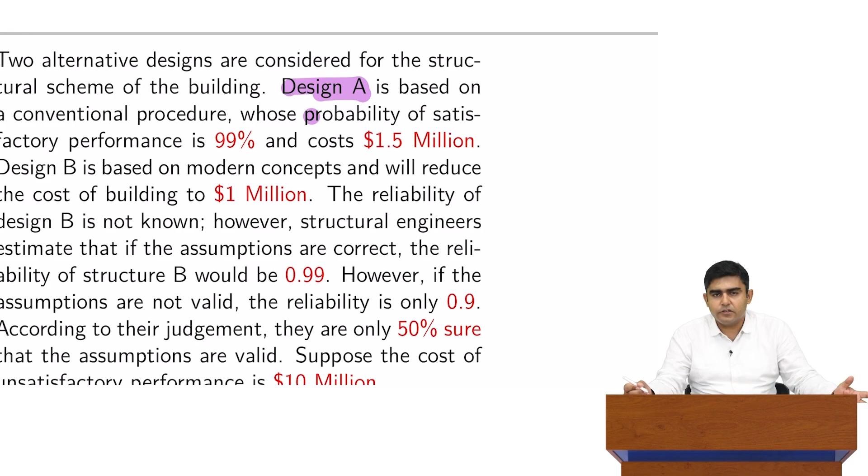Here is the example we already discussed regarding a decision problem where two alternative designs are being considered for a structural scheme of a building. Design A is based on a conventional procedure, how things are usually done, and its probability of satisfactory performance is 99%, with 1% chance of failure, and it will cost around $1.5 million.

Similarly, design B is based on modern concepts and will reduce the cost of building to $1 million, a substantial saving of almost $500,000. So we should be inclined to go with design B and the case is solved. But that's where additional information comes into picture, that is, the concept of reliability.

Further information is given that the reliability of design B is not known because it's a new design. People cannot comment on its reliability or long-term performance. But structural engineers made some estimates while designing, based on certain assumptions. If these assumptions are right, structure B would also have reliability of 99%, same as structure A. However, if assumptions are not valid, reliability is only 90%. According to judgment, there are only 50% chances that their assumptions are valid.

So they made certain assumptions, and they are 50% sure those assumptions are right. If assumptions are indeed right, the structure is 99% reliable. If assumptions go wrong, the reliability drops to 90%, in comparison to 99% for option A.

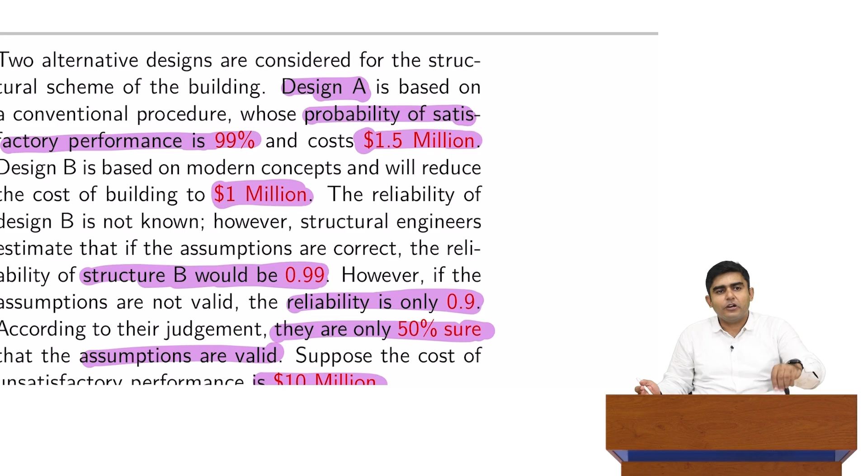Now there is a dilemma. Should we go for option A or option B? Before we solve that, let us pay attention to various components we saw in this problem. We saw multiple elements of uncertainty, multiple costs associated, and we have to integrate all of these together.

This is not mathematical integration, but bringing all this information together into a systematic framework. That is where decision trees become important. What we saw earlier is a decision problem, and all its components can now be integrated into a decision tree.

What will a decision tree have? It will have all feasible alternatives available to us. In this case, two designs are our feasible alternatives, design A and design B. It will also list all the probability assignments, that is, the chances of satisfactory performance of A, B, or other options if multiple are available. In our case, we only had two options, so what are the probabilities associated with A and B?

And monetary or utility consequences associated with each outcome. For example, if the structure performs satisfactorily, the only cost we bear is construction and maintenance cost. If the structure fails after construction, we have already paid for construction cost, and now we have to pay for consequential costs, which are 10 times the construction cost. So all this information can be systematically integrated into the decision tree.

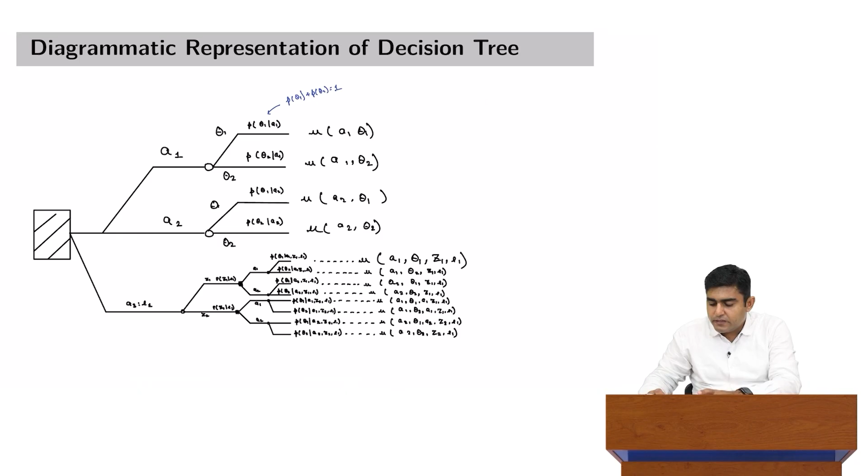That is, what is the cost of going with option A and option B. When all these elements—alternatives, probabilities, and costs—are listed exhaustively, we end up with a decision tree that can help us make decisions in a much more informed manner. Let me put all these things together generically, showing how a typical decision tree with multiple options looks. This is the first square node we spoke about. A1, A2, A3 are all the alternatives available to us.

A1 and A2 will have certain probabilities. For example, in the earlier case, theta 1 can take a value of 0.99 and theta 2 can take a value of 0.01, where theta 1 is associated with satisfactory performance and theta 2 with non-satisfactory performance. U1 and U2 are the costs associated with theta 1 and theta 2.

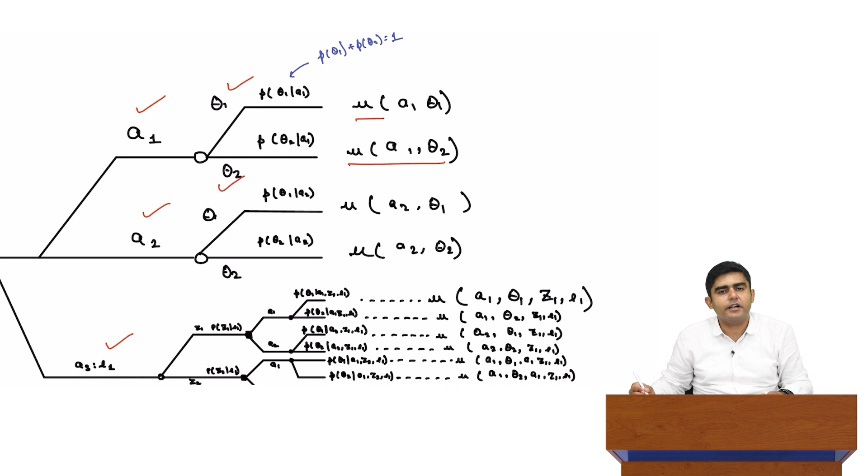Now, if you pay attention, we have been talking in terms of conditionals here. Given that we go for A1, what is the probability of things going right? Given that we go with A1, what is the probability of things going wrong? This cost is a function of the decision we made and the values of probabilities associated. So here, A1-theta1 and A1-theta2 come into picture.

Now, if I have n number of alternatives available, I can repeat the same pattern. But notice that when I walk along A2, I will again encounter theta 1 and theta 2 at my chance node, represented in circular fashion. Now theta 1 would be conditional on having chosen decision A2, and theta 2 will also be conditional on having chosen decision A2. The final costs would be a function of A2 and theta 1, and A2 and theta 2. Depending on more details available, these decision tree branches can take a much more complex form.

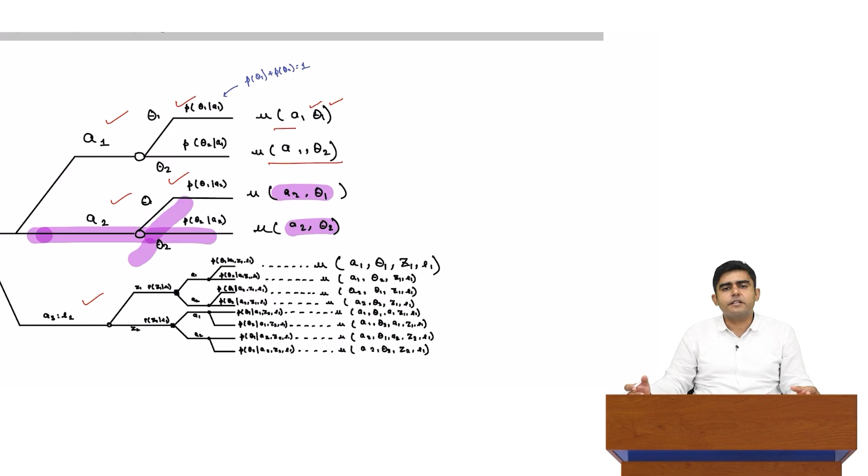We won't worry about that at this stage, but all these components when put together give us a decision tree to systematically analyze and take a call on the options available.

There are a few points we have to note before constructing our own decision tree. Outcomes from a chance node are mutually exclusive and collectively exhaustive. What do these two words mean? Let us pay attention to that. Mutually exclusive means either the structure is failing or the structure is not failing—theta 1 and theta 2 are mutually exclusive of each other.

They are also collectively exhaustive, meaning the sum of probabilities at each chance node should equal 1. Probability of success is 0.99, and probability of failure should be 1 minus the probability of success, that is 0.01. This has to be followed at each chance node to have a complete decision tree, and that takes care of mutual exclusivity and exhaustivity—sum of probabilities at each chance node should be equal to 1.

If we are ensuring that our entire space is captured, we have already addressed this while talking about collective exhaustiveness—the probabilities should sum to 1. Only then will we say that the description of each chance node is complete.

Finally, the desirability of consequences of each outcome is measured by the utility value recorded at the end of the sequence. At the end, we will convert it either to a dollar value, rupee value, or some other utility, and compare across alternatives so that we know which particular alternative gives us the highest utility, even in monetary terms or otherwise—and that will be our final decision.

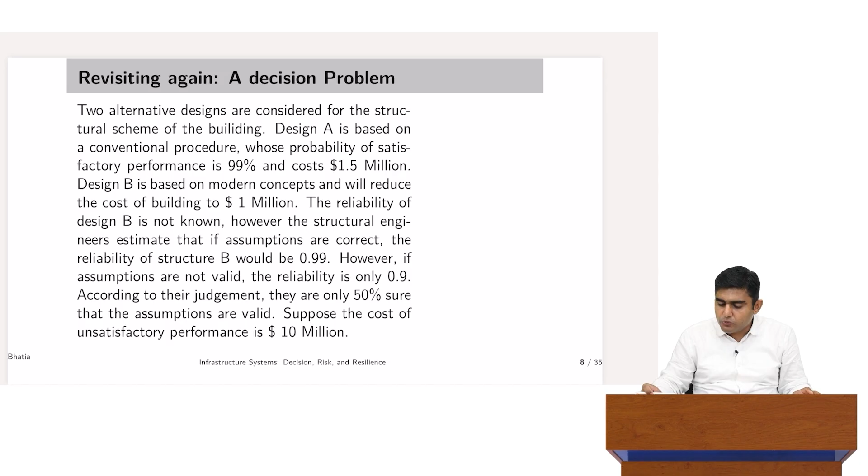So with that, we can go back to our problem again and try to come up with our decision. The same problem stated again, but now once we make a decision tree of it, it would look very different and much more elegant.

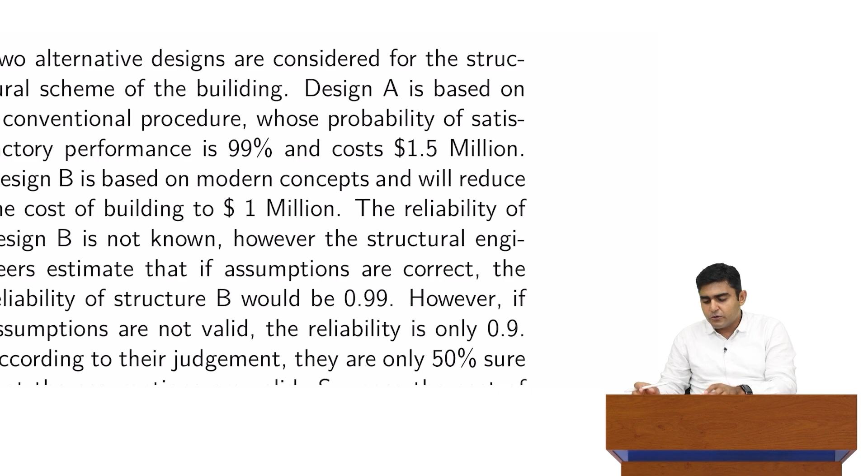Same text, two options A and B, having different probabilities. So we have to construct the decision tree for this. Let us start this process of constructing our own decision tree. What is the first step? We have to place a square node from where alternatives will be born. I also call this the root of any decision tree. From this root, two branches will take off: one associated with option A, and the other associated with option B.

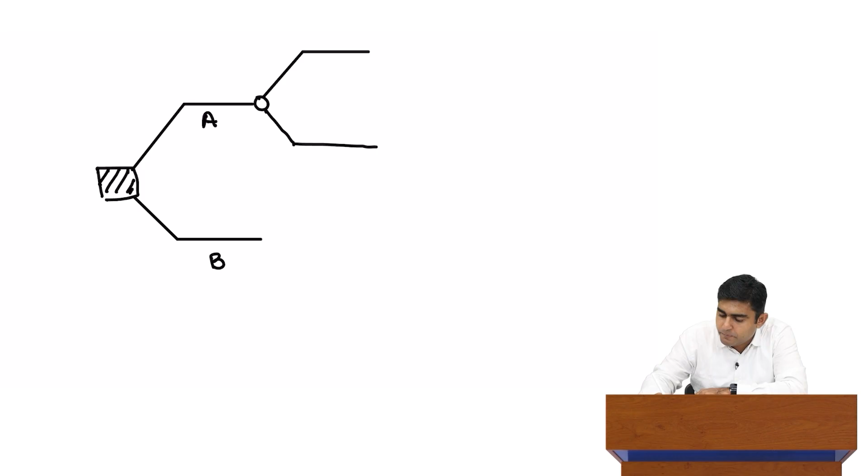Now, option A is not guaranteed to perform satisfactorily 100% of the time. In fact, it is stated that it will perform to the desired level of functionality 99% of the time. So we will say the chance of not failing, anything with the hat, makes it not failing. Chance of failing should be 0.01, and this takes care of mutually exhaustive as well as exclusive events happening here.

Now, when A does not fail, what is the cost associated with that? Cost associated is whatever is the cost of construction, 1.5 million, because if you are going with A, you have to construct A. So the cost is 1.5. If A fails, what are the costs associated? 1.5, the cost we incurred while constructing it, plus the additional or consequential costs we have to pay when the infrastructure fails, which is another 10 million. So the total cost becomes 11.5. In this case, it is 1.5.

Now let us do the same exercise for option B. This decision tree will take a more interesting form because we don't have confidence on failing or not failing. We have made some assumptions. If the assumptions are correct, the chance of it happening is 50%, or the assumptions themselves can be incorrect, with chances of that happening again being 50%. So again, this is a chance node.

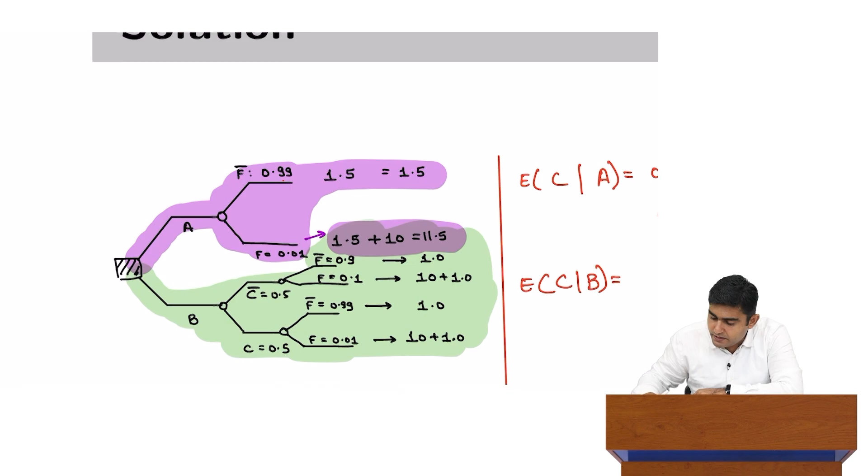Similarly, when I go for B, expected costs: here there is a 50% chance that my assumptions are correct. When my assumptions are correct, the chance of not failing is 0.99, and the associated cost at that time is 1 unit. The chance of it failing is 0.01, and the associated costs are 10 plus 1.

When my assumptions are incorrect, that can happen with 50% chance. That's why 0.5 comes here.

Hence the costs are essentially separated for component A and B and summed differently for individual branches of the decision tree that we have constructed. When we simplify it, this number comes out to be 1.6.

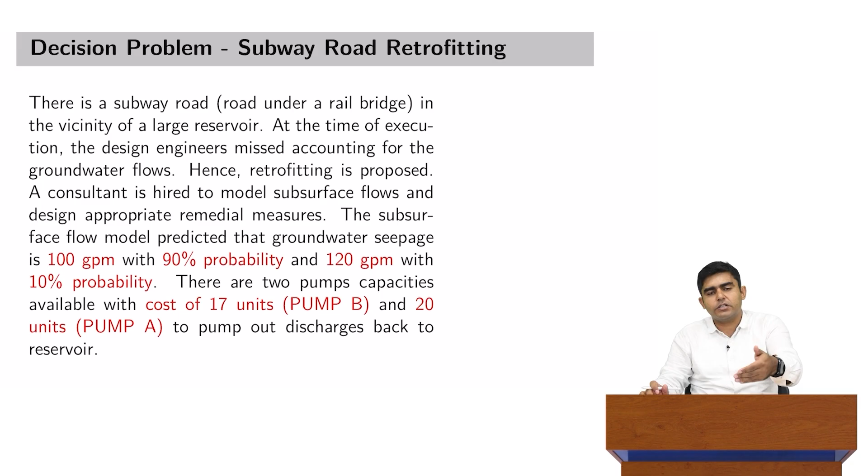And this is what decision tree and decision making looks like, despite all the confusions, options and uncertainty available to us. Of course, this is a very simple example, but we also encounter decision trees in real life. The previous example that I took is one of the examples in the textbook we are following, that is Ang and Tang volume 2.

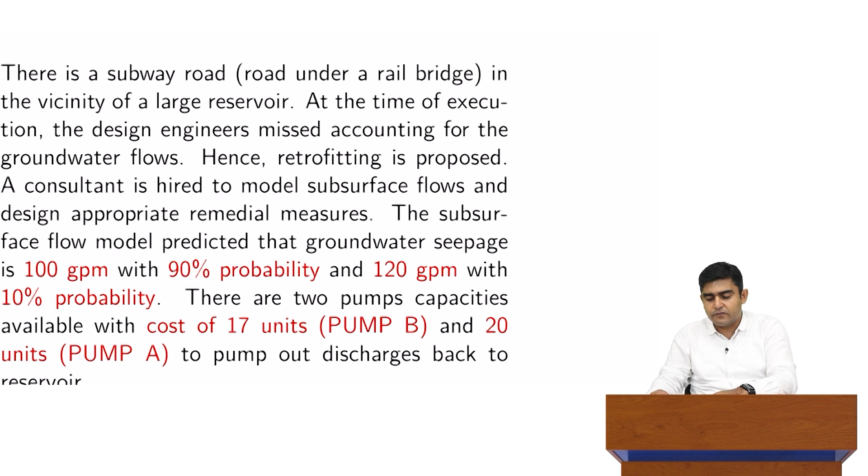But the example I am talking about now is a real world example from one of our own projects that we did for one of the stakeholders. And this is an interesting problem.

What it states is that there is a subway road that goes under a railway bridge in the vicinity of a large reservoir. That reservoir is full most of the times. When that subway was being constructed, the designers missed accounting for the groundwater flows that may come from the reservoir. While water from rains and other sources were accounted for, that reservoir in proximity, we missed somehow.

Hence, it was proposed that we should do some retrofitting and avoid the flooding situations in the subway. So a consultant is hired to model subsurface flows and design appropriate remedial measures for that particular infrastructure.

The subsurface flow model predicted that groundwater seepage is 100 gallons per minute with 90% probability and 120 gallons per minute with 10% probability, because modelers would also not have all the information that they would desire available to them. So they will also make some approximations about subsurface strata, about the level of water in the reservoir, how far that particular water is, when you also account for the porosity of the soil, how much length that water has to travel to reach the subway and so on.

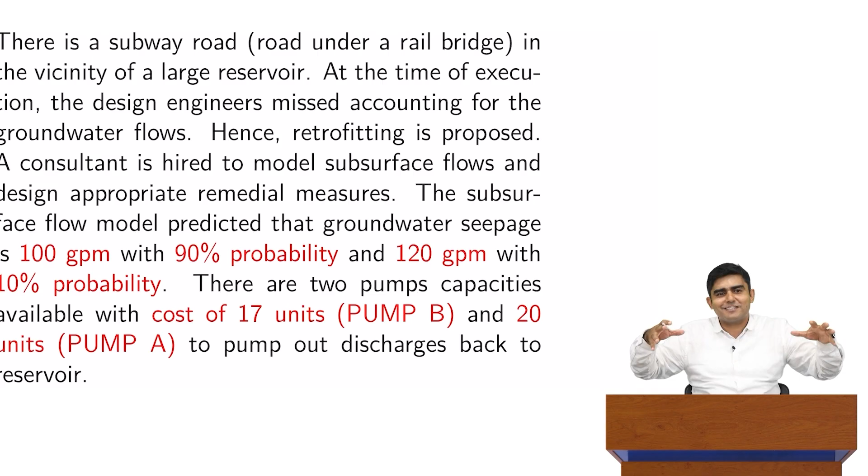And the cost of pump A is 20 units to pump out discharges back to the reservoir. Of course, a smaller pump will also cost less money, and a larger pump will cost us more money. If flow is less and a larger pump is installed, we might have wasted some money, but the cost of maintenance of the larger pump in that particular case would be a bit lesser because its capacity is much more. It is running at lesser load, so the deterioration would happen at a bit slower rate, and all those numbers are also needed.

Now, since pump B is of smaller capacity and discharge is indeed higher, that means there may be a situation of flooding. So what we may have to do is that if we end up installing a smaller pump and more water comes in, we may have to augment the capacity and install another smaller pump, which may cost another 8 units. The design life of this entire project is 30 years.

During that time we will encounter certain maintenance costs and replacement costs that we calculated to net present value of 22, 21 and 5 units. This is a new term, net present worth or net present value. When we talk about money matters in decision making we will cover this in detail, but right now these are the costs we may have to pay lump sum today, at the decision making point, for various pumps. For pump A we may have to pay 22, for B 21, and for C 5 units.

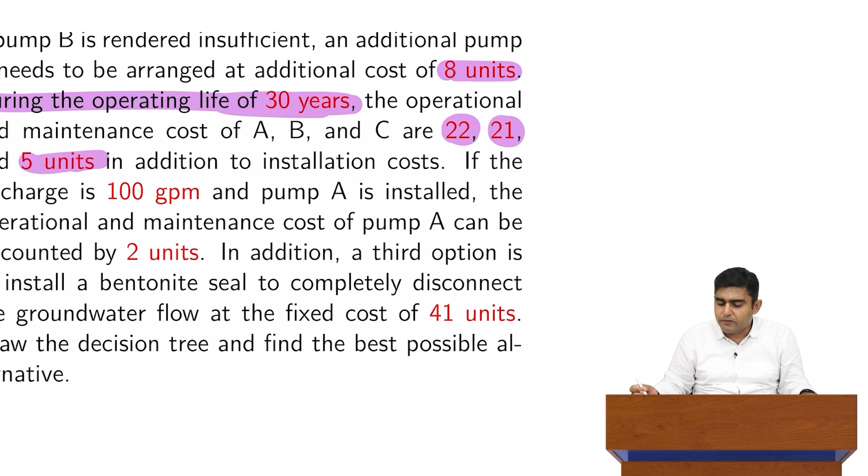If the discharge is indeed 100 gallons per minute and pump A is installed, the operation and maintenance cost of pump A can be discounted by 2 units, because discharge was less, so a bigger pump installed there would deteriorate at a much slower pace, saving maintenance costs. However, if discharge is 100 and pump capacity caters to the same discharge, there may be heating problems requiring frequent coil changes, so the cost cannot be discounted in that case.

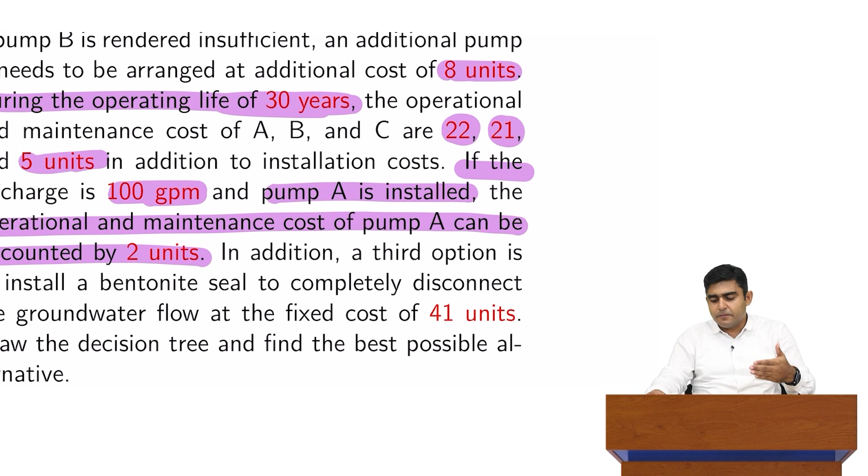A third option is available: don't worry about installing any pumps, instead install a permanent cut-off wall beneath the surface, like a bentonite slurry seal, that would cut off all the phreatic lines so water can never enter into the subway, providing insulation from that water. Of course, this will cost a lot of money, about 41 units. Now the question is simple: draw the decision tree and find the best possible alternative.

There are too many components here, so it's easy to get confused. Even as a practitioner, the first thing I would do is diagrammatically represent all the elements involved in this question and understand what is given and what is being asked.

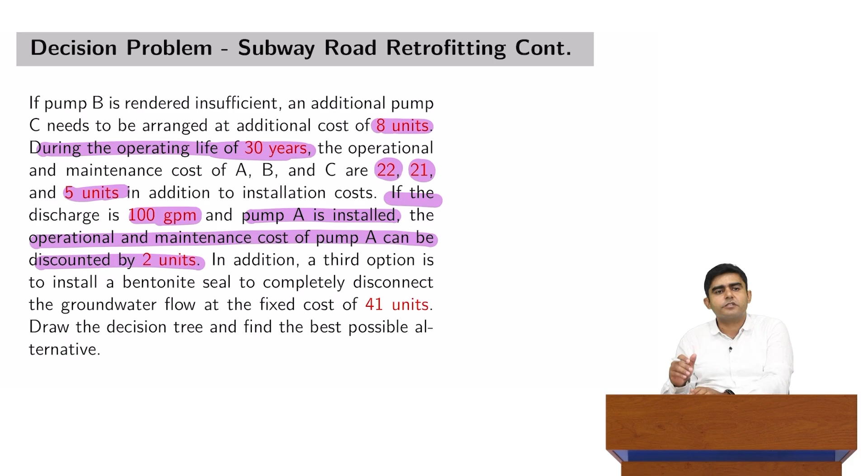Here is a representation of the same problem. Here is a reservoir, and here is that particular subway, which is our element of interest. The railway is positioned on top of it, and this is used by vehicles most of the time.

Two possible flood levels exist: 120 GPM, which can happen with 10% chance, and 100 GPM, which happens with 90% chance. The higher flow has less probability, and the lower flow has more probability. Let us keep it simple with so many numbers involved.

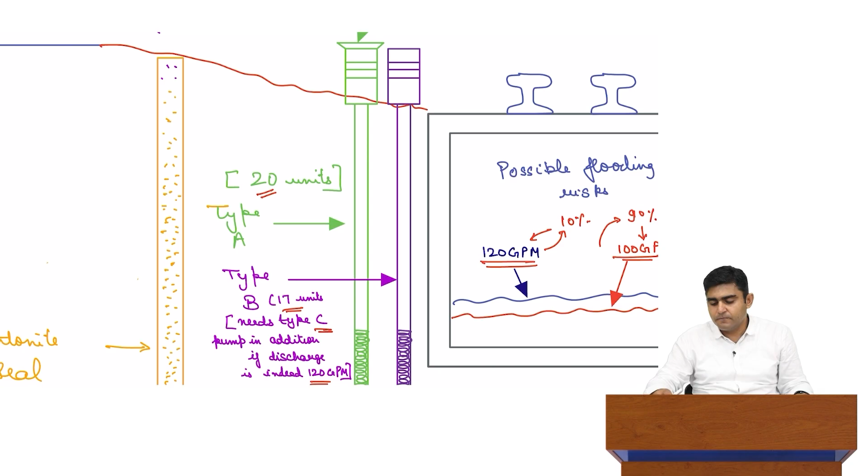Two options are available: either install type A pump, with capacity 20 units, or install type B pump, with capacity 17 units. Since B is a smaller pump, it may also need a type C pump if the 10% discharge scenario occurs, costing another 8 units to cover the mismatch in capacities. A third option is to put in a bentonite seal for a fixed cost, with no maintenance needed, eliminating the pumps entirely. We have to express this as a decision making problem.

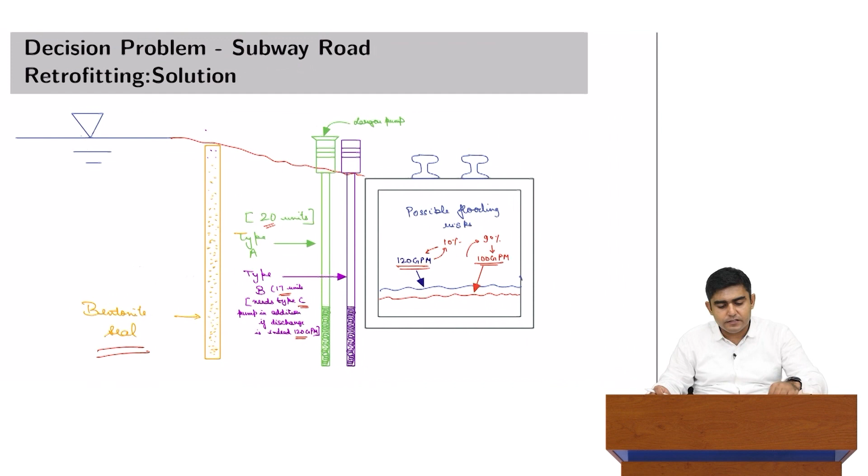Let us go back to basics and construct the decision tree. Again, the first element is the square node. What are the alternatives available? Go with pump A, go with pump B, or go with option C, putting in the bentonite seal. I will call it a seal, since I'm using the nomenclature C for the small pump C we may have to add.

When we go with the larger pump, we deal with some uncertainty in terms of discharges: there is 90% chance that discharge is 100 GPM, and 10% chance that discharge is 120 GPM. When I go with B, again there are two options, 0.9 and 0.1. When there is a bentonite seal, it doesn't matter, because whatever the incoming flow, the bentonite seal should work for 100 to 120 GPM since I've fully cut off the phreatic lines being developed. So this part remains largely very simple.

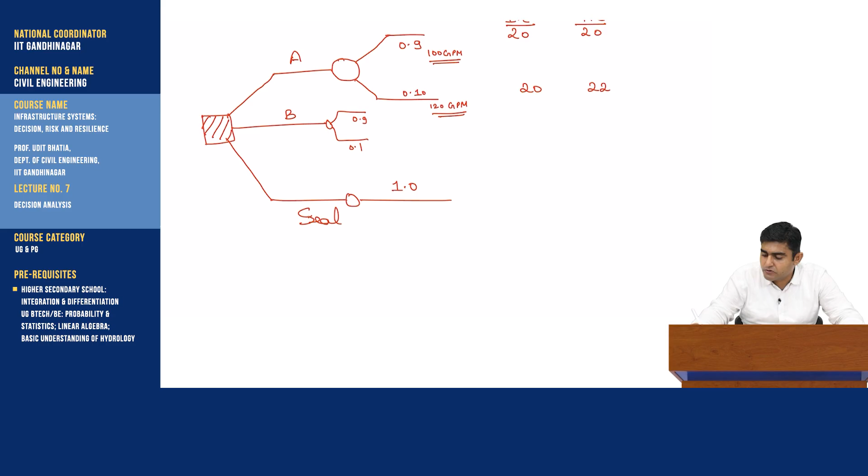So the maintenance costs would be higher, that is 22, but installation costs remain the same, that is 20. So this is my installation cost and this is my maintenance cost, and this is what we mean by discounting, that 22 is now 20 instead of full value.

If I go with B, the installation cost is 17 and my maintenance cost is 21. That is given in the question. That is, if we go with B and discharge is on the lower side, 21 is the maintenance cost I have to pay. If I go with B and discharge happens to be higher, that is, it happens to be actually 120 GPM, what do I have to do?

I have to install pump B at the cost of 17 as well as install an add-on pump C. That would take another 8 units of money.

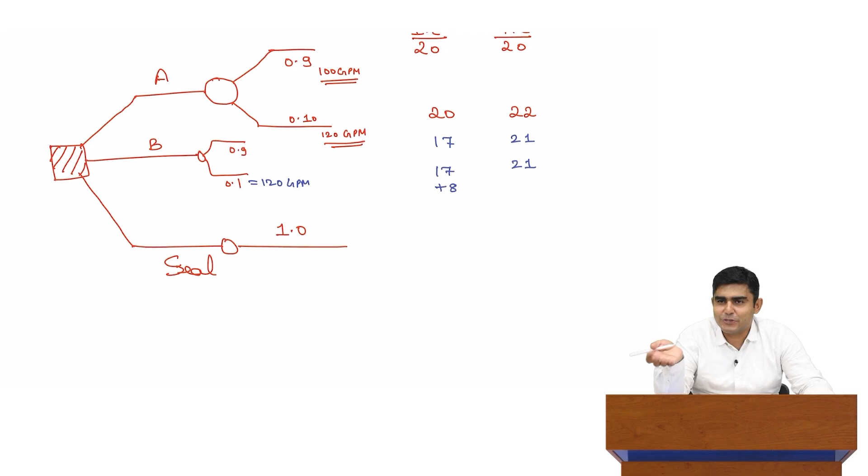What about maintenance costs? Unfortunately, I have to now pay full money for maintenance of B, which would run at full capacity because it is only designed for 100, discharge is 120, so it is doing its work at full capacity. Plus, I have to also maintain a smaller pump, which in this case is C, and it has a maintenance cost of 5 units. So the total maintenance cost here comes out to be 26 and installation cost comes out to be 25.

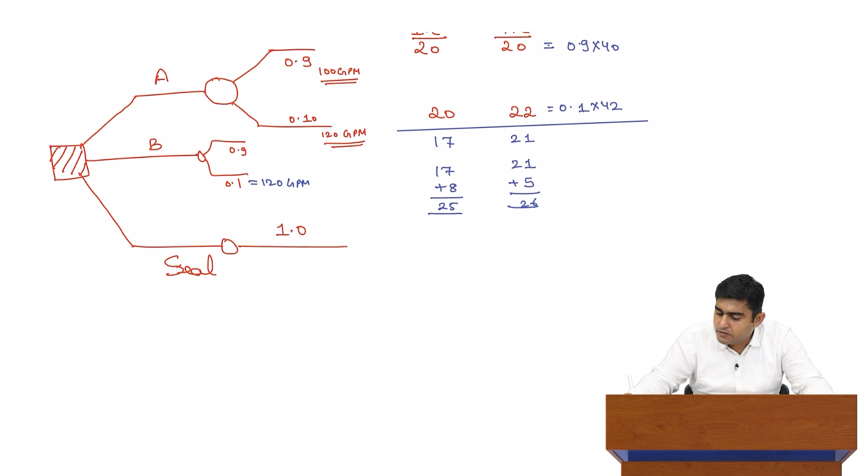And now if I have to calculate the total expected cost, it is simply 0.9 multiplied by 40, plus 0.1 multiplied by 42. Because the probability of this is 0.9, total costs are 20 plus 20, and total probability 0.1, total costs are 20 plus 22, hence 0.1 into 42.

When I go with option B, the total cost in the first case is 0.9 into 21 plus 17, which is 38. In the second case, 0.1 into 25 plus 26, which is 51.

So in this case, if I have to calculate the expected costs given I go with option A, I have to pay 40.2 units. If I go with option B, I have to pay 39.3 units. And if I go with option C, that is bentonite seal, which is a fixed cost product, I have to pay 41 units.

So now, amidst all the confusion, I have clarity that I will go with option B, because if I have to only make a decision on cost benefit analysis, 39.3 is the lowest among all these three. I'll pay 39.3 units. I'll go with the smaller pump.

And if my discharge is indeed 120 GPM, I will augment the capacity by installation of a smaller pump. And even if it looked like, oh, I have to now pay additional maintenance costs at the end of life of that particular project, I am still investing lesser money by going with option B.

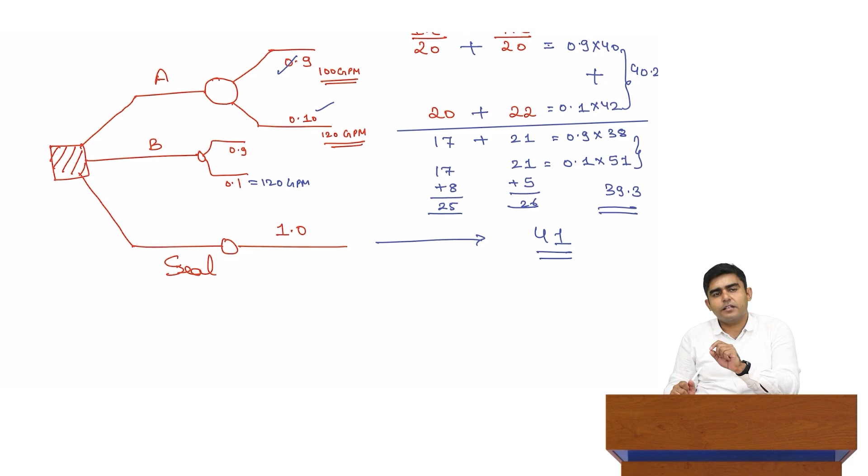This is a good example of how real world information that comes with so many numbers and uncertainties can be systematically analyzed, and we can convey with confidence that based on the cost benefits associated with options, I am going with option B. Even if our common sense would have said we can go with option B because it costs less upfront money, we still need a much broader rationale to also account for the uncertainties associated with that, and that's what inclusion of probability into decision making enables us to do.

Now that we are familiar with this concept of decision tree, let us talk about prior analysis versus terminal analysis in decision making. Whatever problems we were looking into, they all broadly fall into this category of prior analysis. That is, when we came to construct the decision tree, all the information was available to us, like the probability of failure and costs associated, and we start constructing our decision tree.

This is why it is called prior analysis. If you recall, we also had the word prior when we were talking about Bayes theorem, where posteriors and priors were related to each other through likelihood. This prior analysis borrows the term from there. It uses initial data and assumptions without updating from new evidence.

We also have the equivalent in decision trees, what we call terminal analysis. In terminal analysis, we update the analysis as and when new information is available.

If you recall, when we were looking into the Bayesian framework, we looked at a similar example where we finished the exercise, determined probability of floods greater than a certain magnitude, and then new information became available to us. What we did is find a mathematical way to systematically incorporate that information into our analysis, updated our prior beliefs, and got a new distribution used to determine all the probabilities.

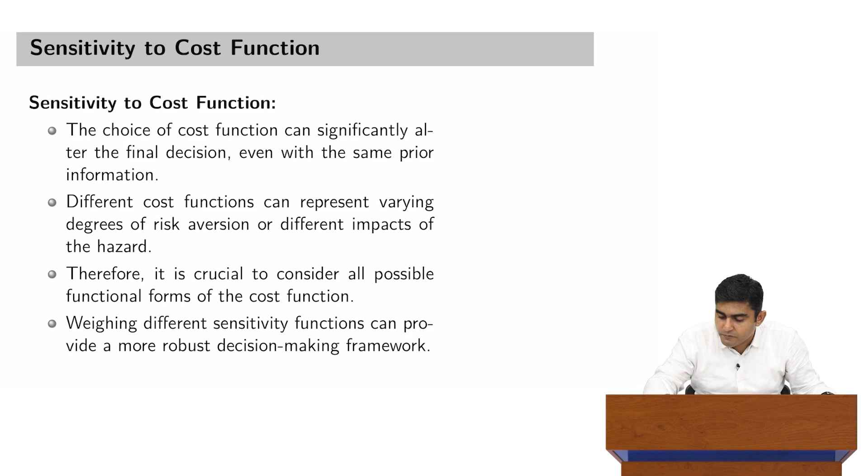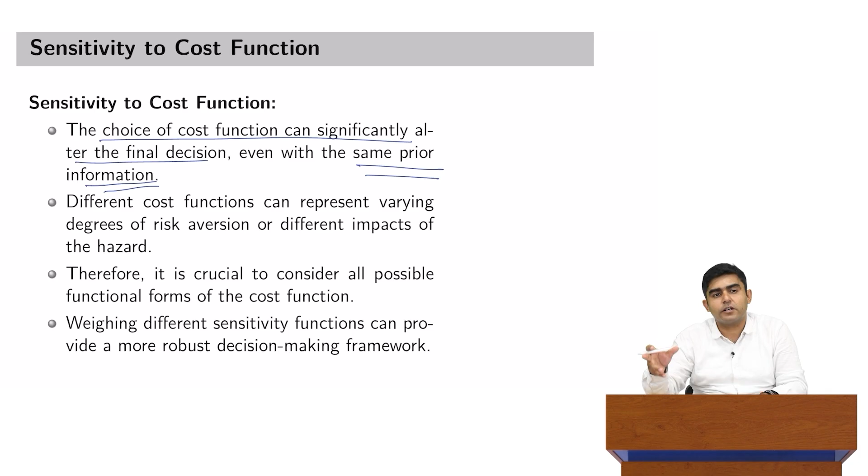So we will see in a few examples how the choice of cost function can significantly alter the final decision even with the same prior information available to us. And it's not just the magnitudes they impact - they can completely flip the choice of decision we make, because ultimately it is the cost at which we terminate our analysis. Hence, if our cost function takes a different form, it can result in very different values or magnitudes of total risks associated with a particular event.

Hence, it is very crucial to consider all possible functional forms of the cost function. Sometimes once we do analysis for all the options and different cost functions, decision makers also use weighting - for example, considering this linear form to be 10% important, this exponential form to be 80% important, and some other form to be the remaining 10% important, and give weighted consideration to the final decision. Again, the point here is that even if we are dealing with decision trees, we are still dealing with uncertainties at every time step, every decision point.

However, this is the systematic approach to take a decision, or reach a point where some mathematics is backing your decision. That's why decision trees are indispensable despite all the uncertainties and sensitivities involved in the analysis.

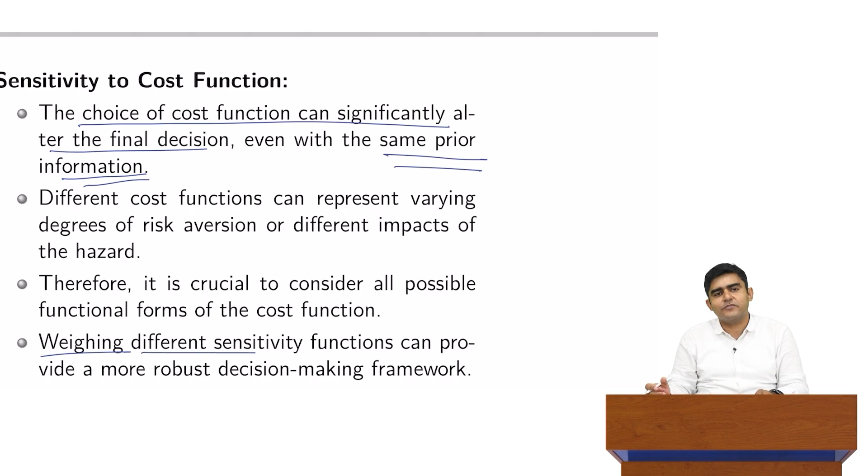Now, to reinforce these particular points, I think nothing is better than an example, again taken from our textbook. Here is an example that covers a different kind of hazard. In this case, we are going to talk about an earthquake. So let us look into this information that is available, slowly try to build that mental map or story, and then we will construct a decision tree out of it and see how the choice of cost function can alter our decisions.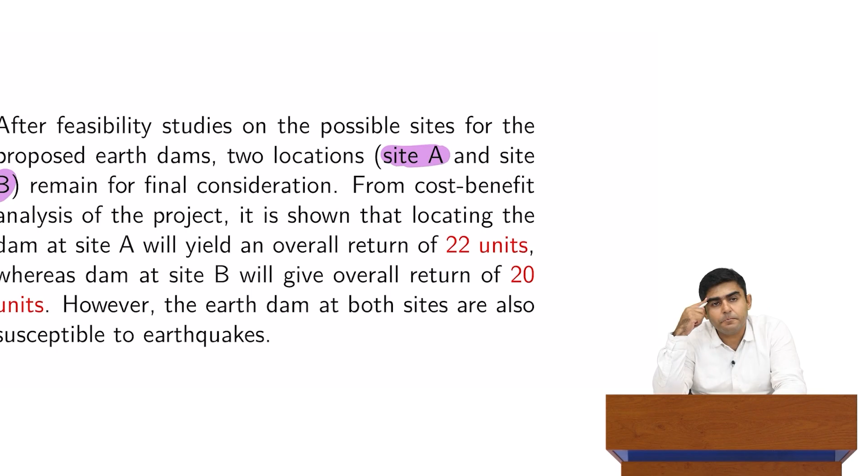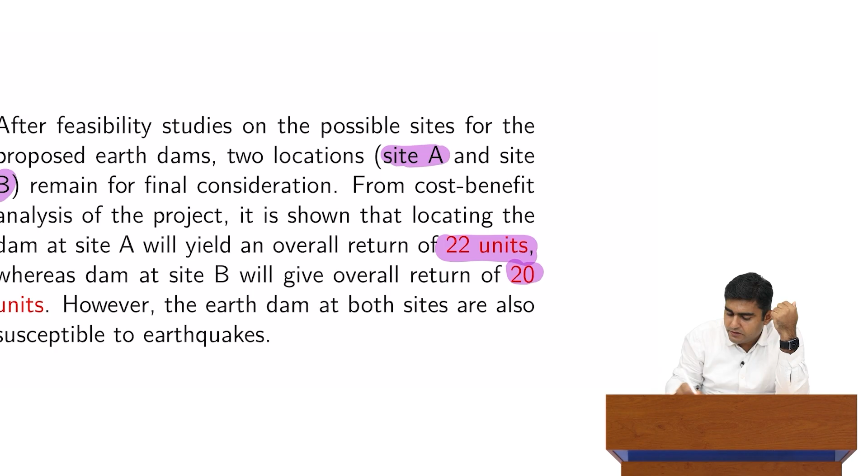So here it's about an earth dam site selection, and we scrutinized an area where we want to construct a dam in a particular region to store water, and we identified two locations - site A and site B - these are the two final sites we are considering. We did the survey and found that if we go with site A, the total yields, positive yields, are of the order of 22 units - that is gains minus construction and maintenance cost, the number comes out to be 22 units. And site B will give us returns of 20 units.

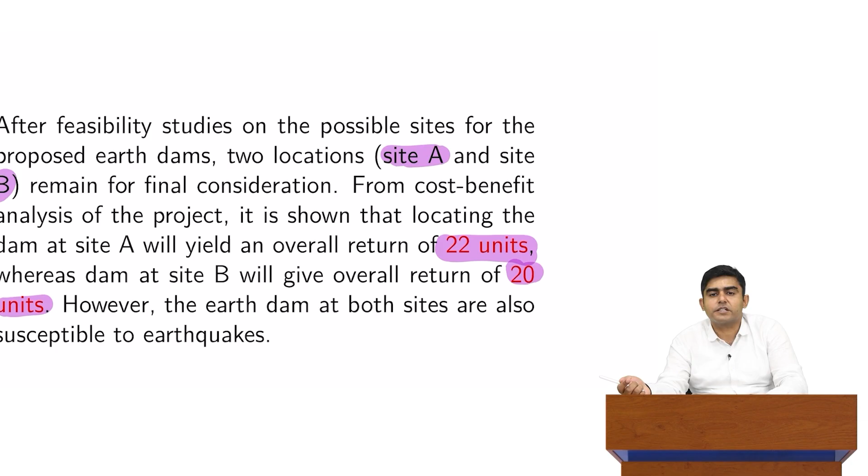If I stop here, it's a no-brainer to go with option A because it gives higher returns, and we have already accounted for all information available to come at these particular numbers. So these two numbers are not the matter of discussion here. What is important is when risk comes into picture, how the uncertainties about A and B come into picture - that is more important for us. Now, both of these locations are susceptible to earthquakes, so we have to account for the earthquake.

Then what we did is conducted seismic studies of that particular area and calculated the annual mean occurrence rate of earthquakes with damaging intensity that can cause damage to that particular dam. At site A, it can have 0.01 or 0.02 as occurrence rate. We are not sure about that.

There is 50% chance that we may have a 100-year return level event or a 50-year return level event at location A, because we are also using some probability distribution functions to derive the return levels, and even the choice of those distribution functions has some uncertainties.

Similarly, when we went to site B, the annual mean occurrence rate is estimated to be 0.005 or 0.01, again with equal probabilities. Now you see that A has a higher annual mean occurrence rate of damaging earthquakes than B.

A was much more beneficial than B. Now with this updated information, confusion has started creeping in: should I save that 2 units or put my entire infrastructure at higher risk? And even there is uncertainty here. So now we have to understand how to bring that into the picture.

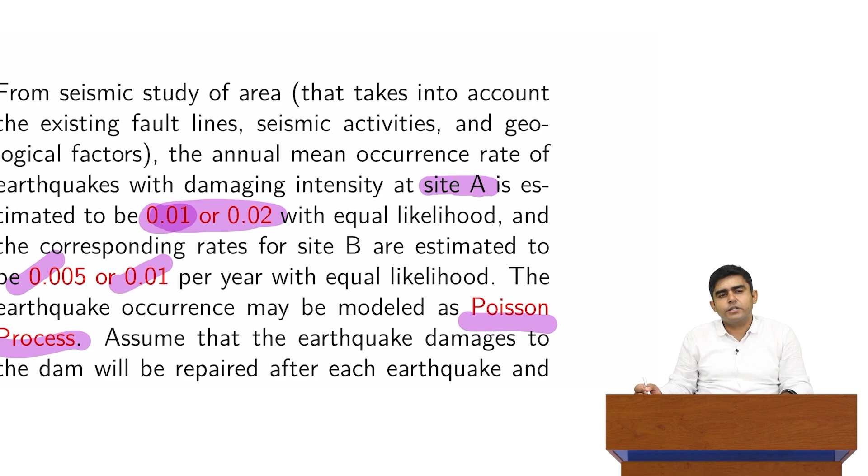It is also assumed that earthquake damages will be repaired after each earthquake and the dam will be restored to its original condition, so construction costs would again be repeated.

What is asked of us is: let X be the number of earthquakes occurring during the design life of 50 years. We have to determine the expected loss for both sites when the loss function is L equal to 5x.

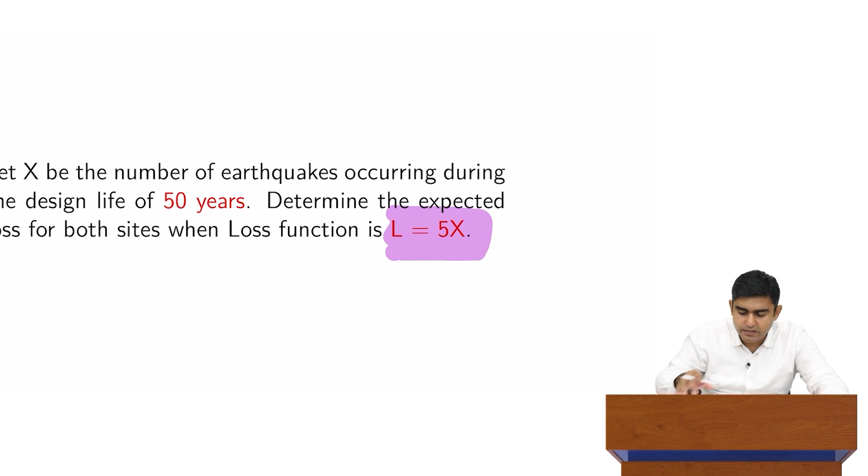So if one earthquake occurs, loss would be 5 units. If 5 earthquakes occur, loss would be 25 units. Both sites can have different numbers of earthquakes occurring, but one thing to note is that loss is a linear function of the number of earthquakes occurring at a particular location. So we have to essentially make our decision around that.

So let us summarize some of the useful data that we encountered in that big text that we read, and after that it would be easier for us to set up the problem as a decision tree problem.

At site A, we have total returns of 22 units. At site B, we have returns of 20 units. Number of earthquakes per year at site A can be either 0.01 or 0.02, with a 50% chance of each.

Equivalent information at site B is 0.5 into 0.005 and 0.5 into 0.01. The loss function in both cases is simply 5x.

Another piece of information we need is expected loss. Expected loss is the loss function L of x, times the probability distribution P of x, which represents how many earthquakes will occur - one, or two, or three, or four - which itself is a probability. So expected loss would be L(x) multiplied by P(x), summed over all possible values of x, that is, we can have 0 earthquakes, and theoretically infinite earthquakes, so the summation domain would be 0 to infinity. X cannot take a negative value.

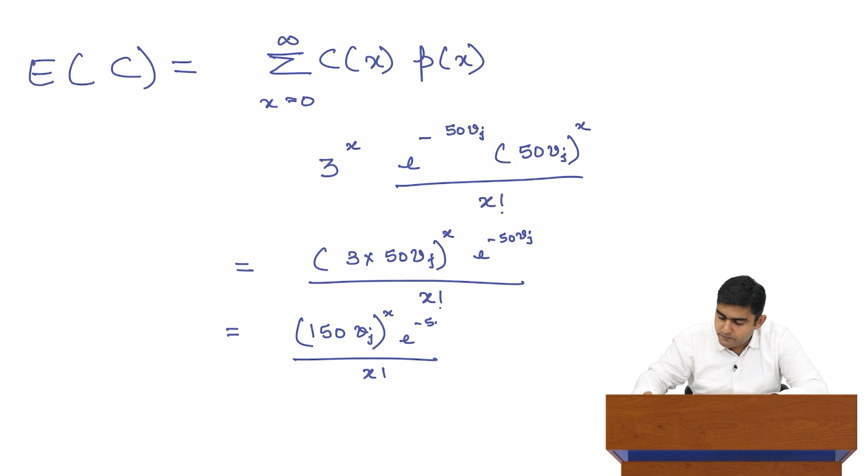If this is correct, we can write this as, now 3 can go inside. This can be 3 into 50 nu j raised to power x, e raised to power minus 50 nu j upon x factorial. This is simply 150 nu j raised to power x upon x factorial into e to the power minus 50 nu j.

If I focus on first summation, if I have to expand an exponential function e raised to power y, its expansion also looks like y to the power n upon n factorial, where n goes from 0 to infinity. This has nothing to do with risk or probability. This is simple Eulerian expansion of e to the power x. On any exponential function, x can be approximated as sum of 1 plus x plus x square by 2 factorial and so on. And I can simply write it here.

Now, if you look into this closely, we have something like y to the power n upon n factorial sitting here. So where we can simply say that if I have to simplify it further and get rid of this factorial, this is e raised to power 150 nu j into e raised to power minus 50 nu j. So these two terms that I have highlighted are similar to each other, where y takes the value of 150 nu j and it's an exponential of x.

Now again, I emphasize here, we use Poisson distribution, we ended up with this particular form of mathematics. This can be a total surprise, but while working on risk, decision and resilience problems, I would not be worried about the mathematics. I can always borrow that particular tool or trick from mathematicians. But my objective is to come at a decision while ensuring that I cross all the hurdles of that particular mathematics, so I would not be bothered that this takes such an overwhelming form. But here, to put it simply, we are borrowing it from mathematicians and putting it in our broader objective to reach whether dam should be built at site A or at site B, using some of the standard or sometimes not so standard mathematical functions that are available to us.

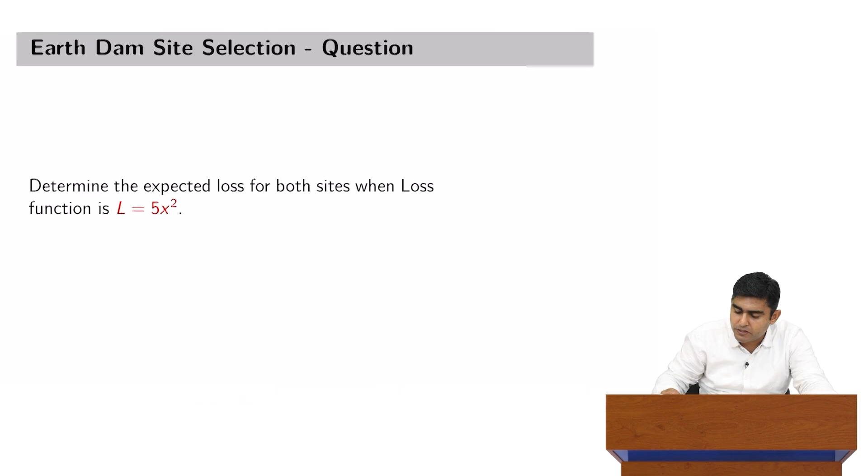Now, the same discussion can be extended to determine the expected loss for both sites when the loss function takes the form L equal to 5x square, and we can make similar mathematics around that. I will do it because this will also bring variance into the picture, since expectation of x square is the second moment, which is closely linked to variance. So for completeness, we will see how the losses or cost function would shape up when functions are of x square form.

So in this case, expected cost Cx can again be written as summation from x equal to 0 to infinity of 5x square p(x). 5 comes out, giving summation from x equal to 0 to infinity of x square p(x), which is expectation of x square, or what we also call the second moment. If we recall, variance of x is expectation of x square minus expectation of x, whole square. So I can simply say that expectation of x square is equal to variance of x plus expectation of x, whole square.

It's a Poisson distribution, so variance is the same as mean. So variance in this case is 50 nu j, because 50 is again the design life, and mean of course is 50 nu j, and we have to take its square. So this comes out to be 50 nu j plus 2500 nu j square.

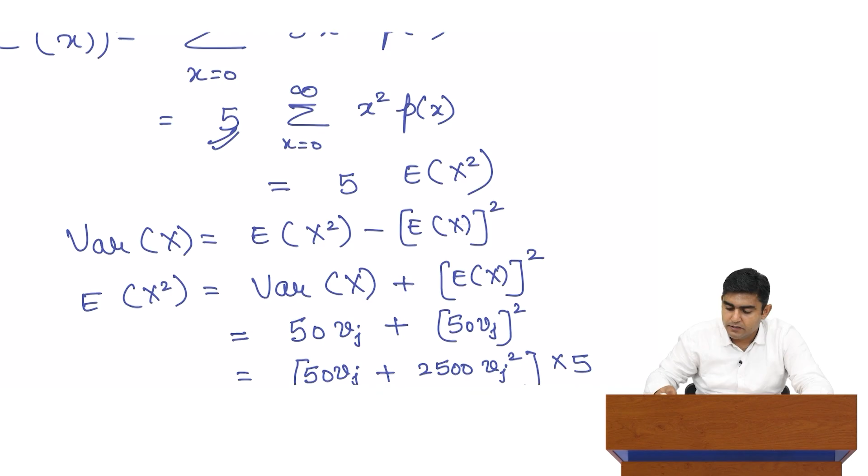Now if I plug in these values, expected loss of A is 250 into 0.01 plus 12500 into 0.01 square, into 0.5, because there's 50% chance we have nu j as 0.01, plus 250 into 0.02 plus 12500 into 0.02 square, again multiplied by 0.5. This comes out to be 6.875 million.

I can work out a similar number for site B, since the parameters change — I will not do it here, but that risk comes out to be 2.636 million. Again, we were saving 2 units when going with A. The total difference in the risks associated from earthquakes is around 4 units. So again, what was a no-brainer when we didn't have information about risk, to go with A, now shifts to B with an updated loss function.

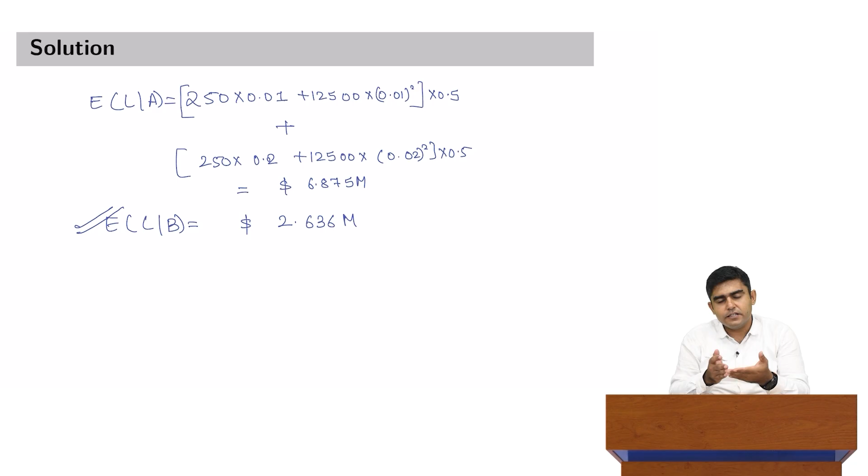Now, in these examples, I think we developed a very good understanding that we can incorporate uncertainties associated with the probability of hazard itself. We can incorporate uncertainties about the assumptions as well as hazards when they are brought together, and we can also incorporate uncertainties associated with the choice of cost function. And that gives us a solid point to conclude our discussion about prior analysis, that given certain information and assumptions, we can use all of that to make a decision.

In our next lecture, we will look into combining some uncertainties in the decision tree — that is, what if these probabilities themselves have some uncertainties associated with their realization. We will discuss that in the subsequent parts. Thank you.